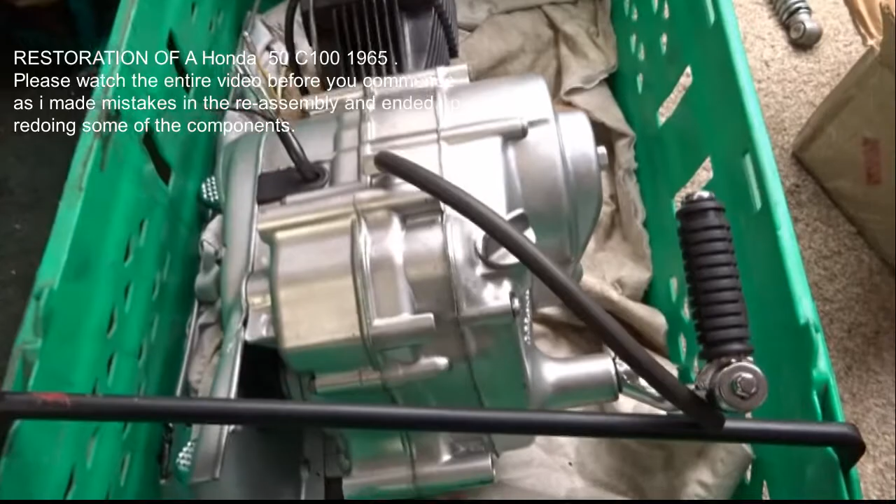This video is the reconstruction and restoration of a Honda 50 C100. I think it's 1964 or 65, probably 1965. I've had the engine restored by a friend of mine. We did a deal on some parts and stuff like that.

These are some of the component parts for it, some new parts, some old parts. These are the two wheels from it, and I have more parts inside in the box here.

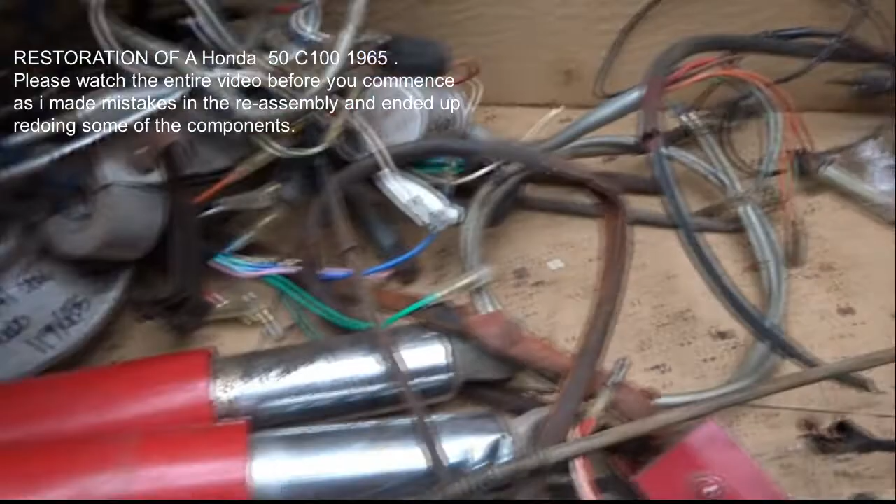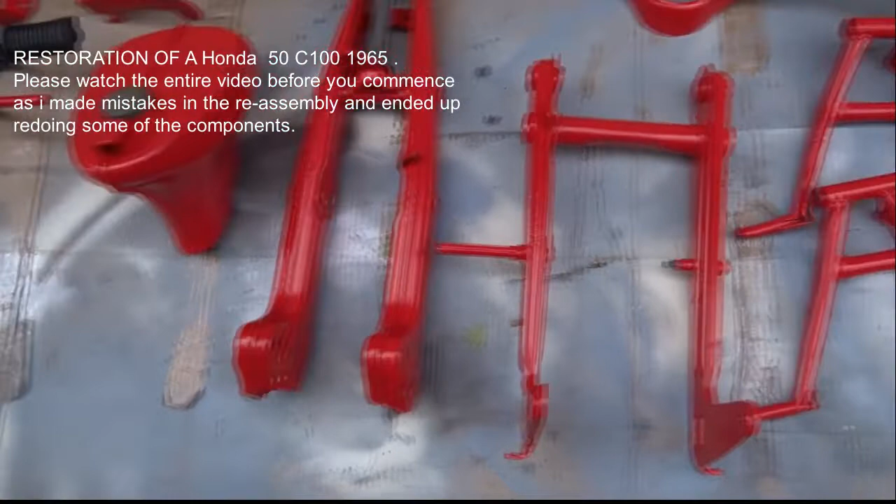These are the main components of the Honda 50 C100, which I've had powder coated. I did two leg rest stands, the petrol tank, swing arm, handlebars, and the back swing arm. I had two stands, so I got them done as well. These are some of the suspension components, which have been in a box now for a few years.

Taillights and grips and stuff like that, and this is the existing seat that was on it. I'm not sure if it's the correct one, but I will check it out and make sure I put the right one on. So that's it. Start putting it together now.

Now I'm starting to restore the bike. This is the front swing arm and this is the main frame. So we've got to put in ball bearings. I've just put grease in there initially, so I've got to put 21 ball bearings there. I must actually grease that side of it as well and put in 21 6mm ball bearings. So that's the next procedure.

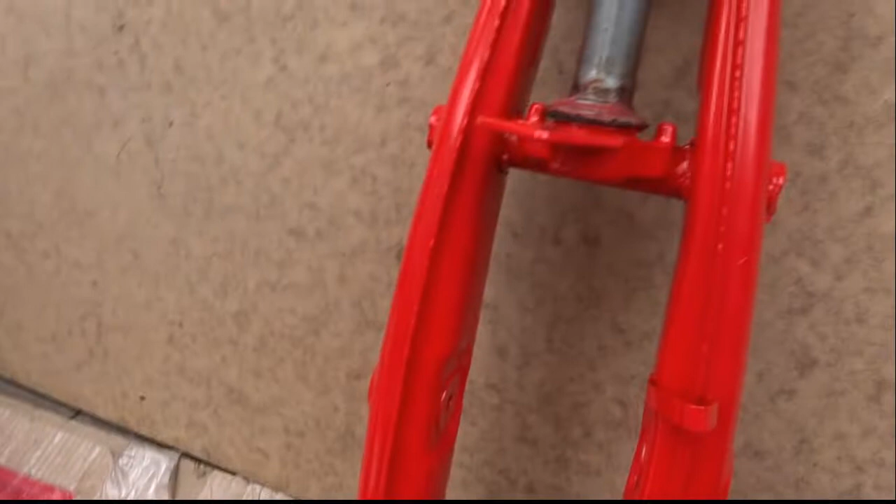I put on the ball bearings, and this goes up here once the ball bearings are on, like this. Now that's the 21 6mm ball bearings there.

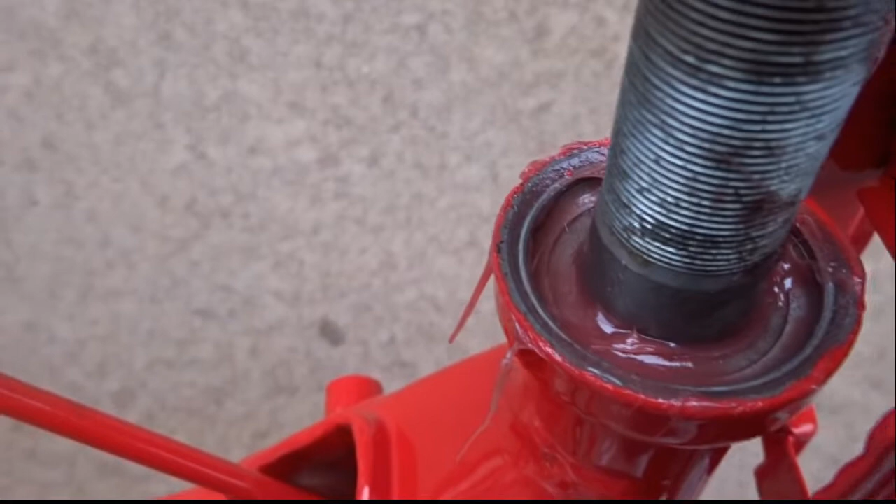Now that's the swing arm and front inserted into the main frame. I've just greased this area here to put in the other 21 ball bearings. Now that's the 21 ball bearings in place. I'll put some more grease on that now.

And then put the top race on, which is this piece here, and it goes down that way. Now I'm just inserting the top race, which goes down there, and it spreads the ball bearings out evenly.

And then this is the next piece that goes on, down over that, and screws down all the way.

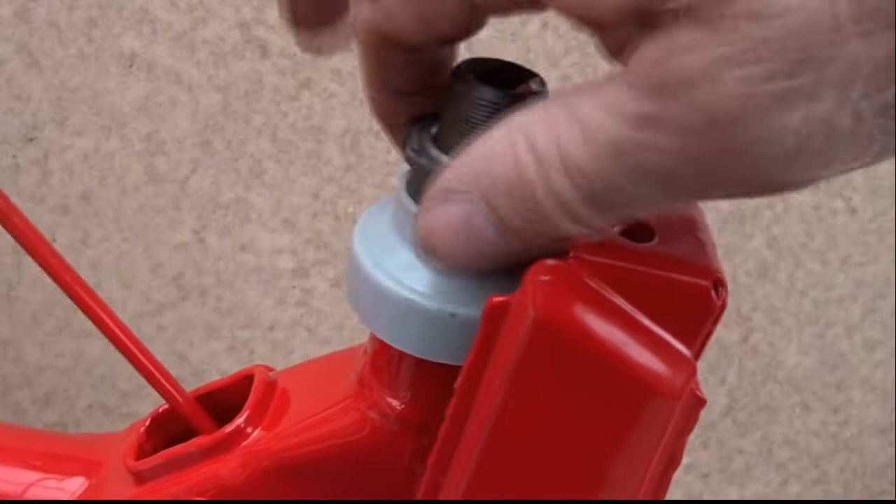Right, that's down in place. Now the next piece to put on is this piece here, which takes the handlebars. There's two holes there and two bolts that must go in there. I must have a look and see what size bolt goes in there.

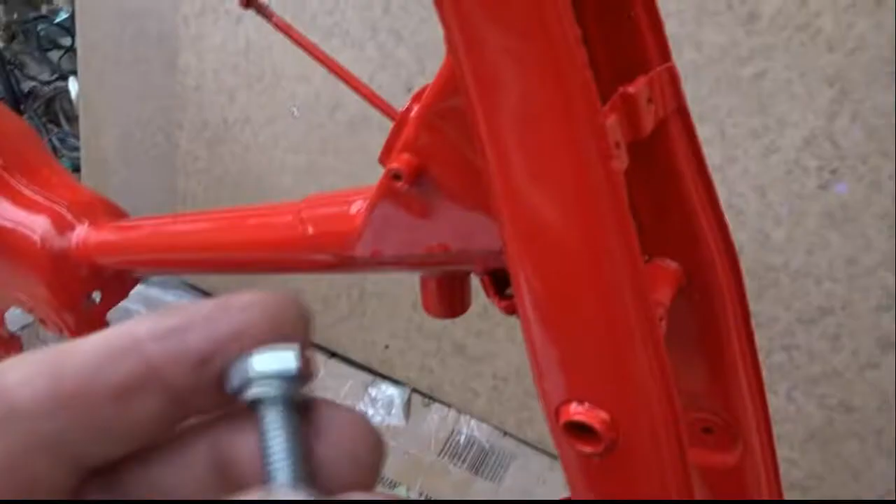And this nut tightens it down here. So I must check in the book now to see what bolts go down there. Right, I've looked at the book. Now the book that I have doesn't give the size of the bolts, but I'm using 8 by 20mm with a spring washer. It says shake proof washer there. I'll see if I have shake proof ones. Actually, I might put a shake proof one on it, but the spring washer should do the job.

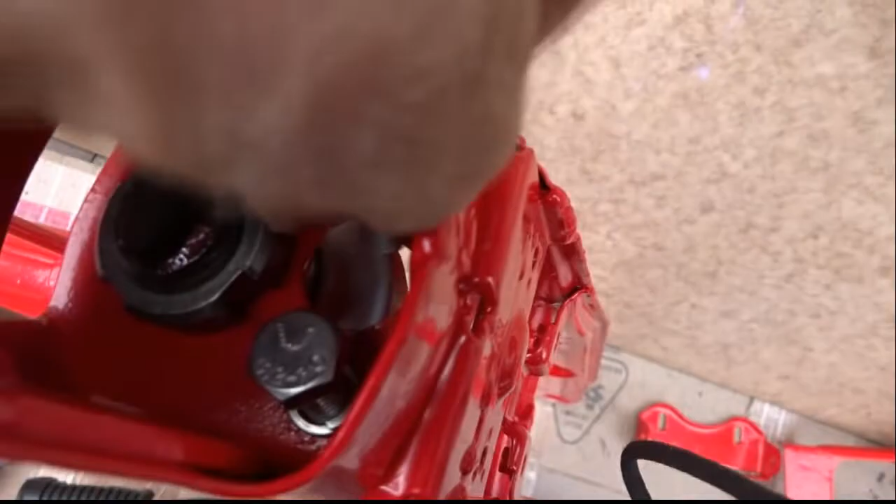I'll thread the two of those down there now. You need 2 hands, 3 hands, or 4 hands sometimes if you're filming as well. Now that's the 2 8 by 20mm ones I've used, that was what I had. So I must just tighten up this bolt here a bit more now.

There doesn't actually seem to be any kind of a lock washer or anything on that, which is unusual, but I'll just tighten it up a bit more. I don't have the special tool. I would imagine there was a special tool because there's 4 grooves on that there, but I don't have it, so I'll have to improvise.

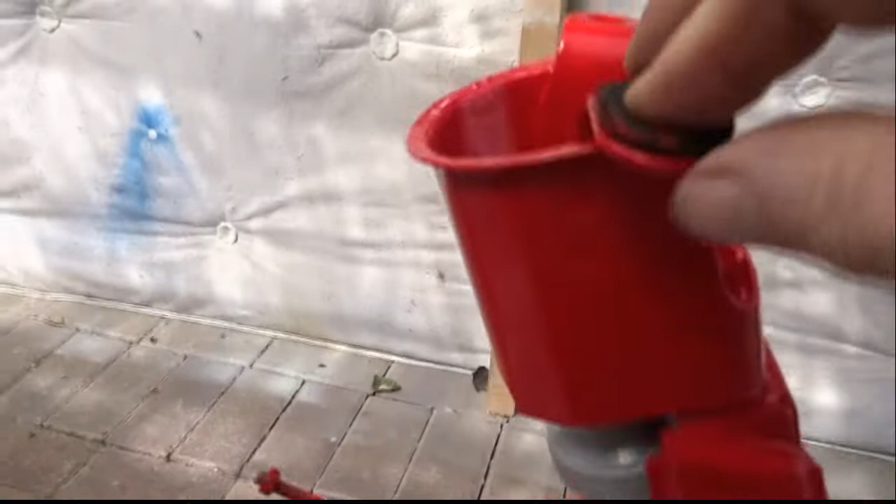Now I'm fitting the handlebars. I've attached the indicator units, and I have the components here. This one has a little section on it like that one there, number 13, which I would assume goes like so, to cushion the handlebars.

Underneath that then, what I've got - now this one looks like it's got a rubber attached to it, which is like this, but the other one that came off of it is like this. So I would assume that one will go up underneath like so, because it actually fits into that section there, fits into that there.

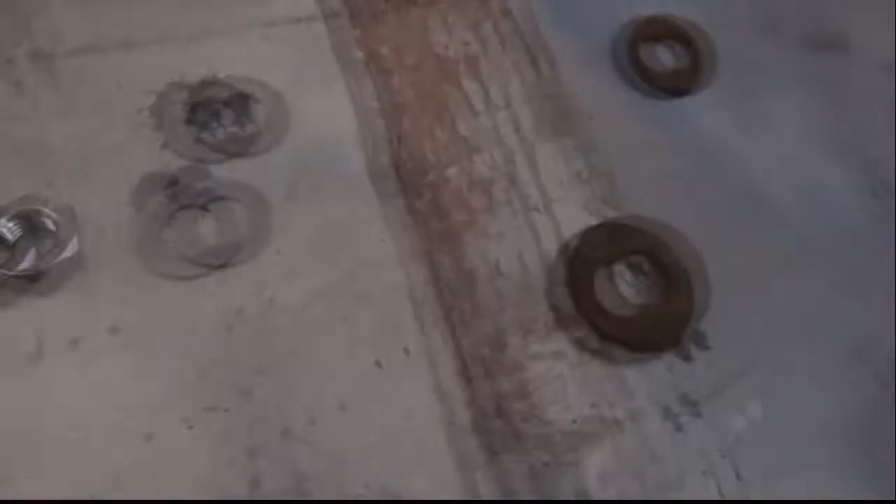Then it shows a washer and a nut, so I'm going to put on a couple of new washers. That's the old washers there, I'm not going to use those. Put on the new washers. Now I've installed the 2 rubbers and I'm going to put the handlebars down over it.

Like so. And that does cushion them nicely.

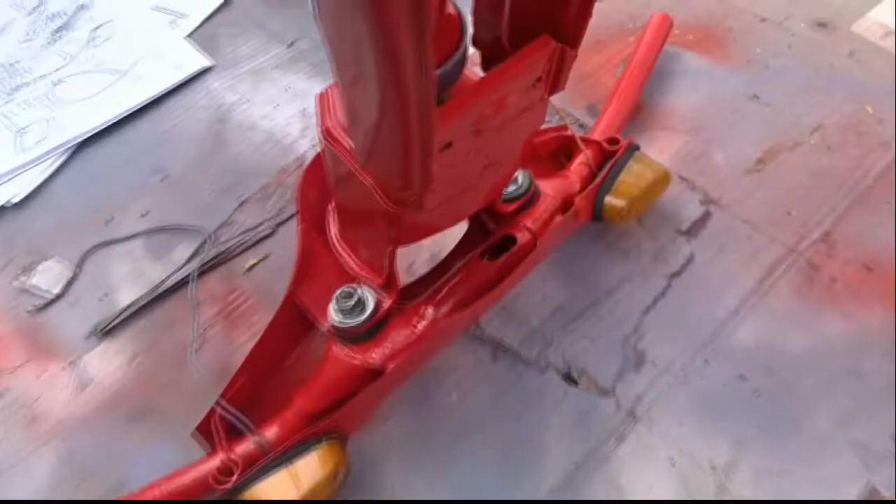Now I'll put on this fella underneath, a couple of washers and a nut. I've just turned the thing upside down because it was easier to put it on, and that's the handlebars in place there now.

Now I'm attaching the lock next, which goes on with these 2 little screws which I got off of the old lock. They didn't come with the lock when I bought it. That's the lock in place there now with those 2 little screws.

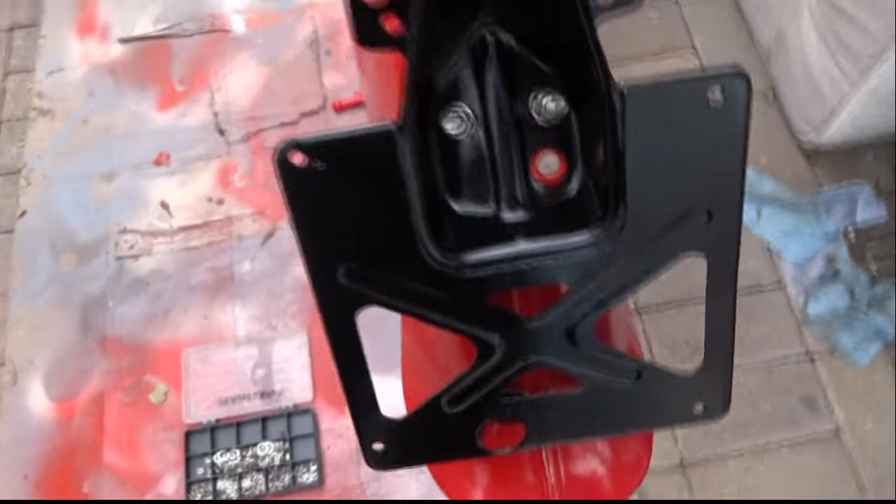I've just put on the stand temporarily there just to put on the rear number plate, and I'm putting it on with stainless steel bolts. There's a 3rd one down there. I hope that it'll work that way now. I'll have to check to make sure that it's okay.

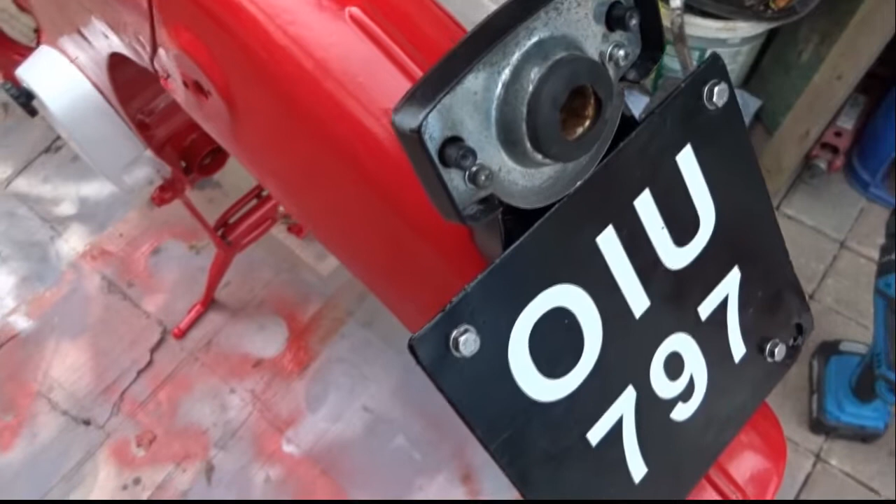Now I've installed the number plate and I've put a couple of new bolts on it to keep it in place, and it's ready now for the taillight. There are 2 bolts that go through the glass that I must get that go in there, and that'll be finished.

I've just put on the side covers there, I'll be taking them off again, and I put on the stand temporarily. I have put on the front suspensions, and I'll go through that now shortly.

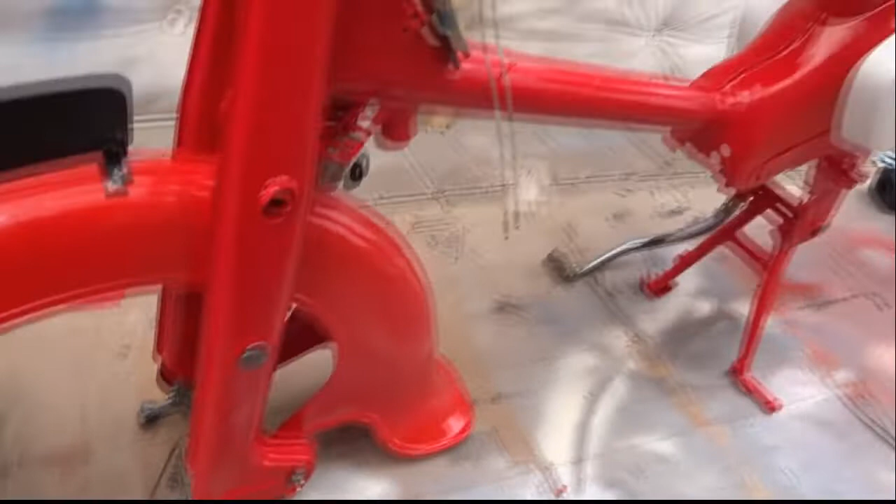Now I'm just going to go through the stage of inserting the suspension, which I've already done. Basically what you have to do is, when the bike is upside down - I had it upside down, I'm doing other bits at the moment now, so I can't turn it upside down - but you put the suspension up through the frame like so until it reaches this hole here.

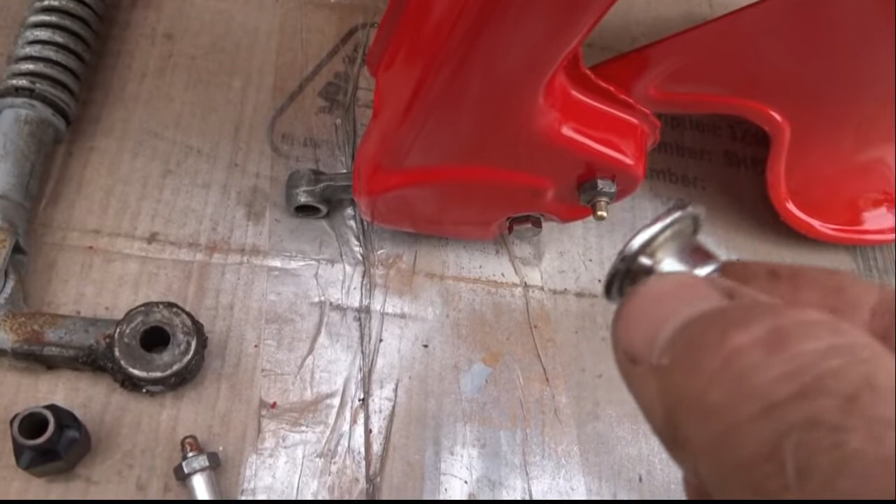Get this section here at the bottom, this section here, to line up inside here. And then put this bolt through here, and this is a special bolt. It's got a small little groove on it there, and there's a similar groove on the frame itself. So you put that through and you tighten the nut up just hand tight.

Then you get this section here in here and you wiggle it about, and you get this bolt and you pass it right through. Now this bolt has a grease nipple on it for greasing, because that needs greasing. As you can see from that one there, it's all grease.

Then when you have the two of them installed, you can then press down on this section which pushes the spring back, and you can then get this section in there and you can line it up. That's the cushion, rubbery cushion support, and then this is the bolt that goes through, so you push the bolt through. Must keep pressure on this at all times so that this thing sits in the right place.

There's no good in sitting it like that. This is the correct way for it to sit. So that's how that was done.

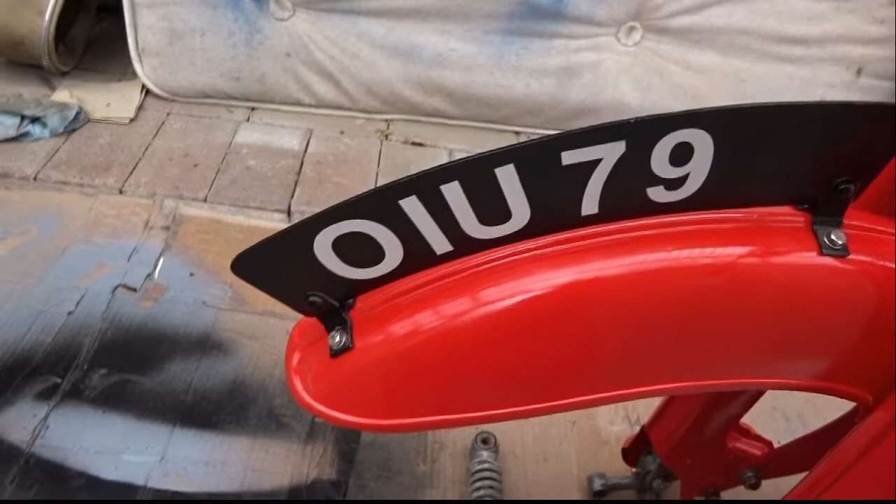I've also put on the number plate. I'm still waiting for a part to come, but there are special brackets which were actually on the number plate to avoid the ridge that's on the front mudguard. As you can see here, they're kind of light, but I put them on with 5mm bolts and washers, spring washers and nuts. So that's that.

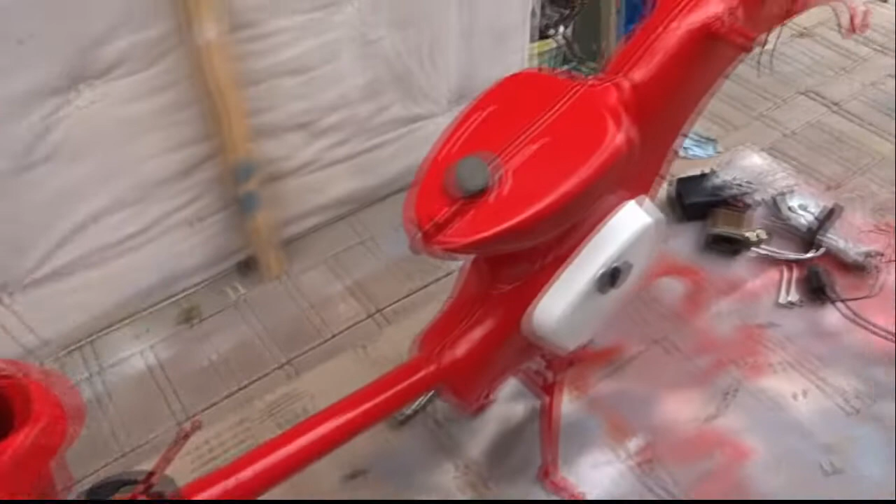What else have I done? I've installed the rear light, rear number plate, and I have the rear light. I must get the 3x60mm bolts that go in there, and I must get a little rubber thing that goes there as well.

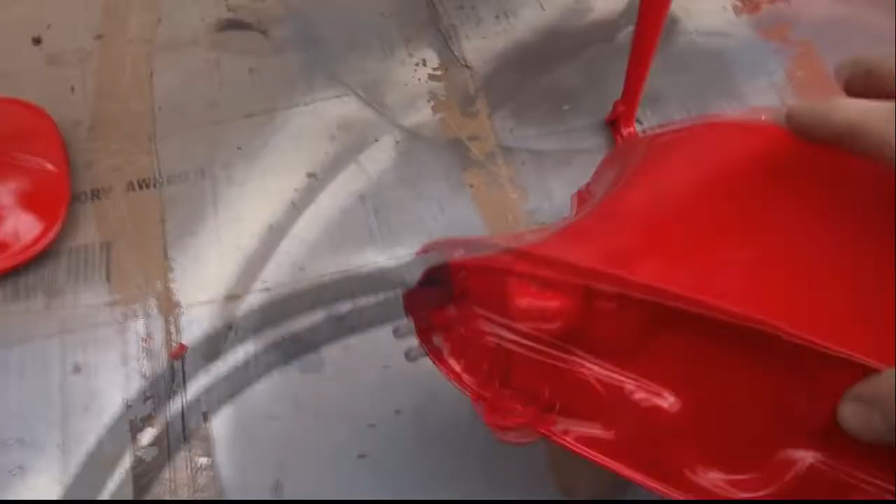So what I'm doing at the moment is I'm fiddling about with the petrol tank. I just put it in there a minute ago just to look at it. So there are two connections on the petrol tank, and these are the old petrol hoses that came off of it, so I'm just going to look at them now and see if I can reuse them. This is a new one that I've installed at this side here, but I'll see if the other ones are usable.

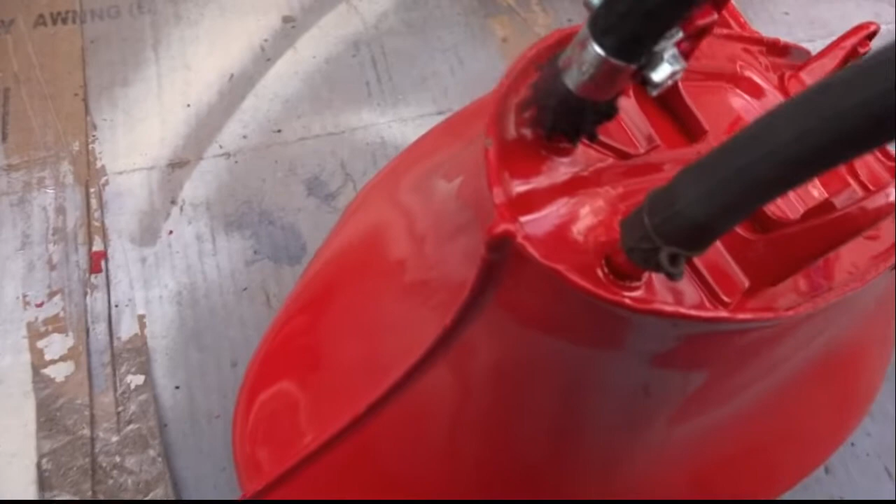Now I'm just after attaching the two. I was able to reuse one of them, I could have used both of them, but as I had this on, I left it on. So I'm after just putting on clips there as well. So now I'm going to insert them. They must go down these two holes here, and there are 4 bolts, 2 at each side, to attach it.

Now that's the tank in place, with 6x24mm bolts as recommended. I'm using stainless steel ones to avoid rust.

Now the next piece I'm going to put on is this piece here, which takes the seat. It goes in like that and down like that.

I think this is where the suspension goes, so there's obviously bolts for this. I must find which bolts, but I think probably 8mm bolts. I must just give it a tap in place and line it up.

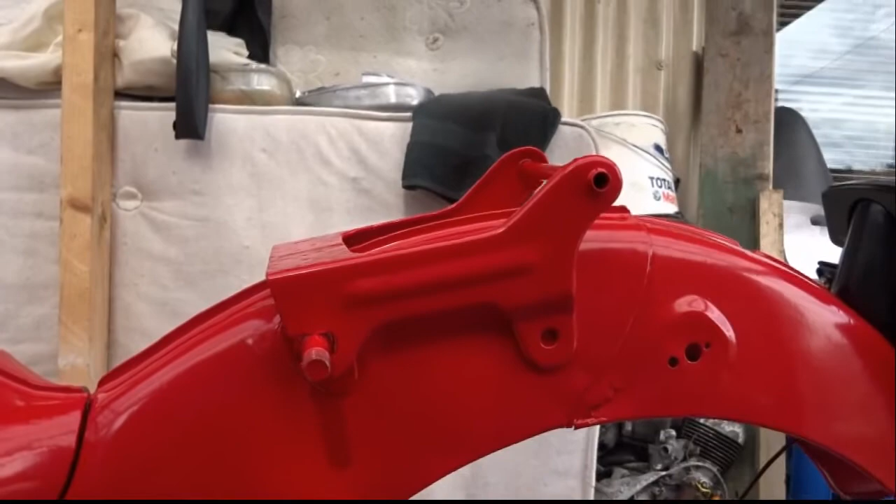Now I've installed the seat holding unit, and I've used 8x16mm bolts, with dome nuts on it, so it's only just two, one at each side.

Well, it looks like in there. So the next thing to put on now is this. I don't have the seat at the moment, I have the seat that came off of it. I might put that one on actually. There it is there, just for the time being while I'm waiting for the other one to come. So this is the seat that came off of it.

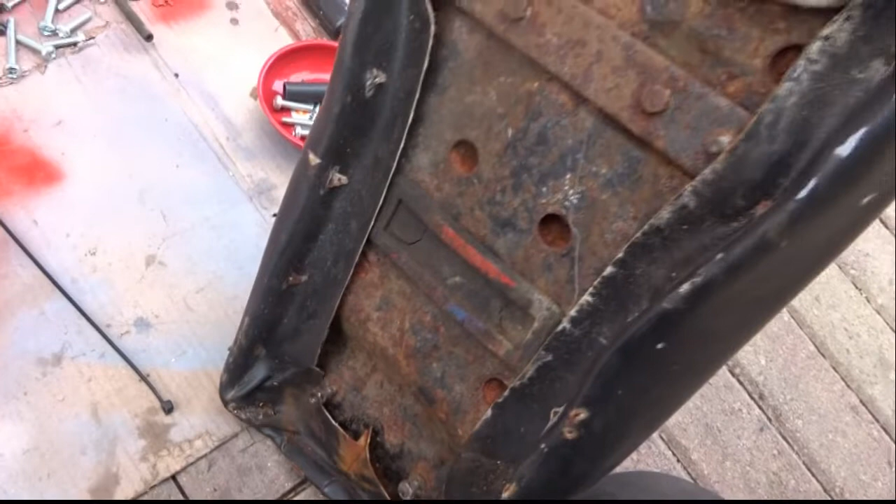But I've been told that, even though I've seen pictures and I have the Honda 1960s C100 and C105 parts list, and the seat is black on it, I've been told that that's incorrect, so I've ordered the grey and white seat, so that's on the way.

So I'm attaching this bracket on here now, just temporarily, just to put it on and see what it looks like, while I'm waiting for the other seat to come. So I need to put in a washer, spring washers.

And tighten up those two nuts, and then attach it on there with this special bolt. So it says in the book to use the special pin, flat washer, spring washer, and a 6mm nut. Now that's actually for putting the seat on, but for putting this bolt on, I'm going to put a washer as well, a spring washer and a nut.

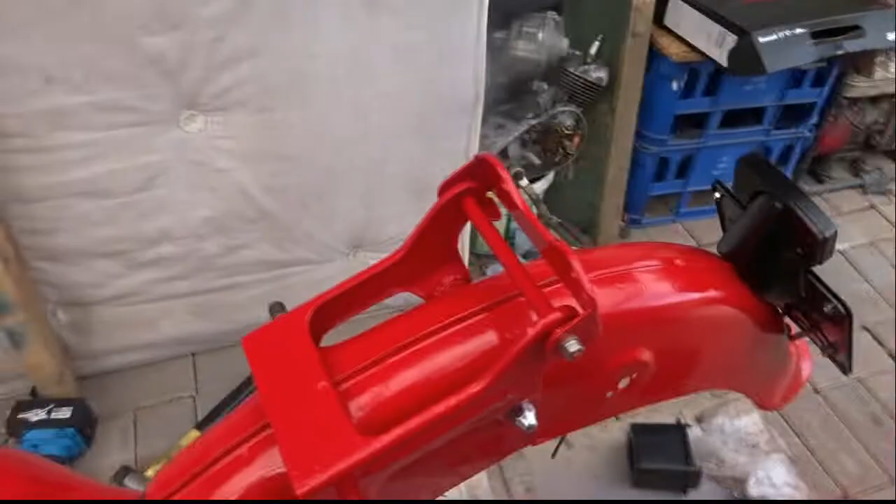So that's that in place there now, the special bolt going through, and it swivels backwards and forwards. You have to put it on before you put the seat on, otherwise you won't be able to get the bolt through.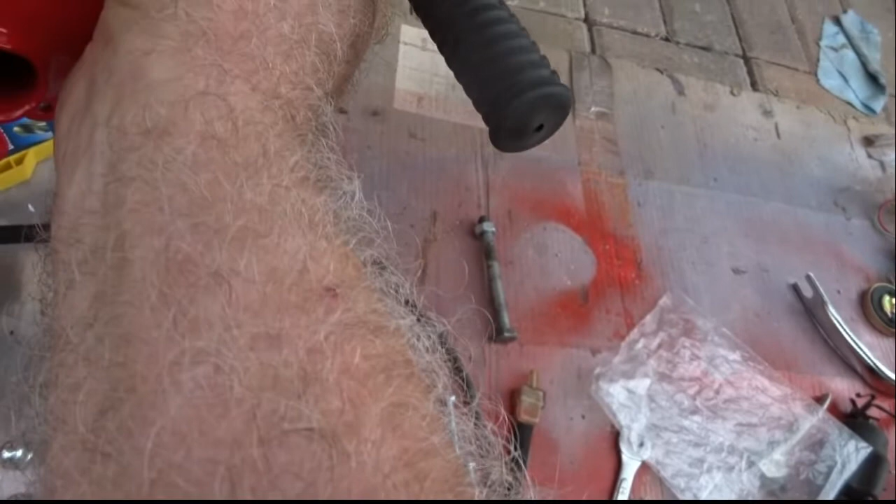This is the rear swing arm section, which goes on something like this, through there, and the rear footrests are on it, and the wheel goes on there, and the suspensions are attached there onto that, I presume.

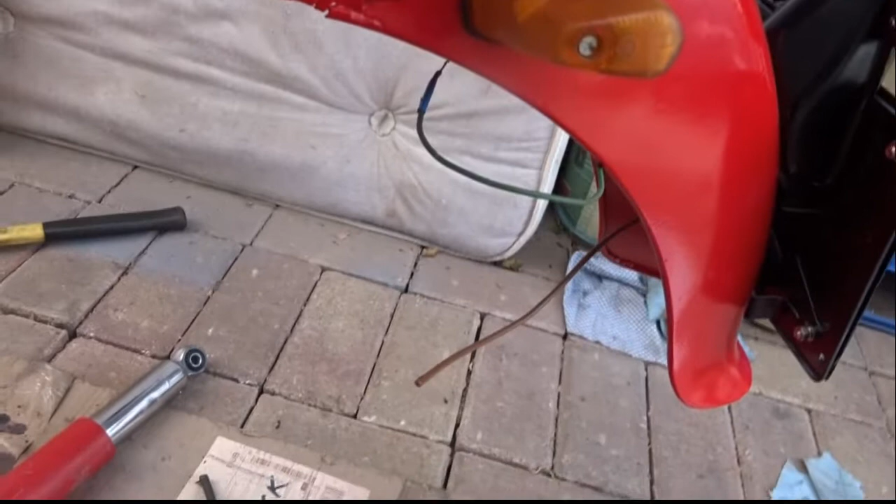I'm just installing the rear indicator units there now. This one I have fixed in place. The other one is here, and basically it's a 10mm nut at the back there that holds it in place through the frame, so I'm going to put that on now as well. That goes through that hole there. So this is the hole at the other side here.

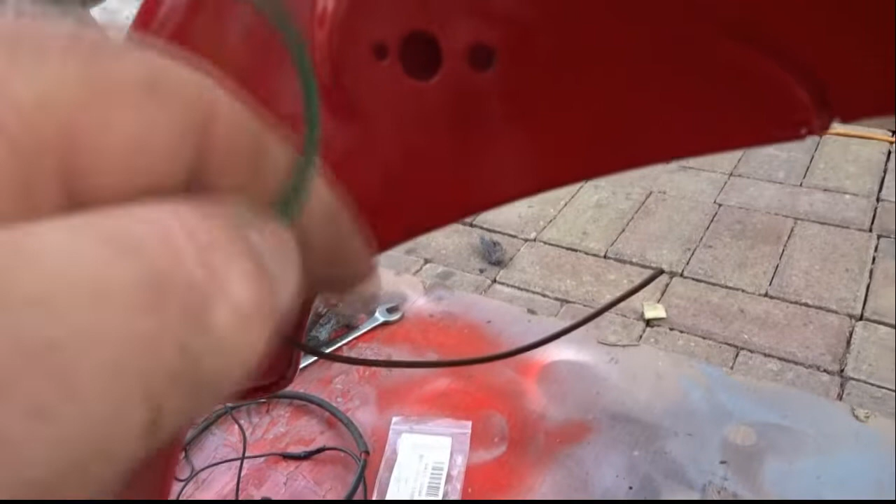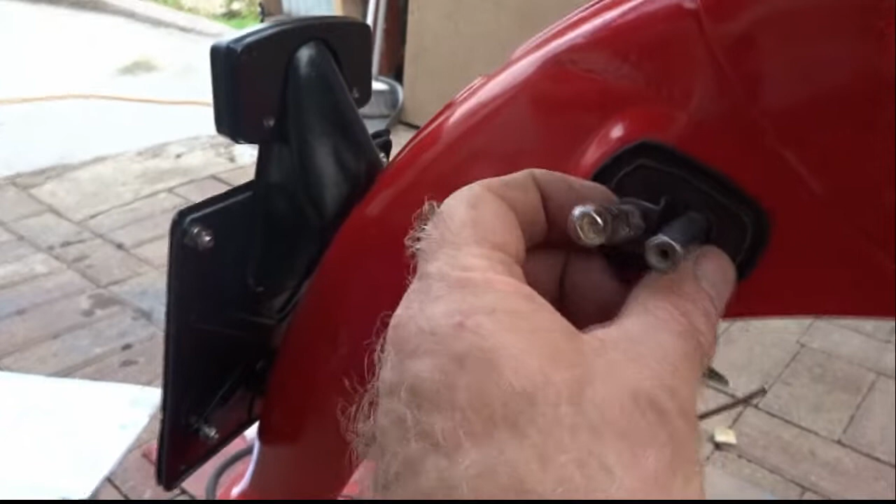The wire goes out through this hole here, and the unit itself goes through that hole there, I think. Yep. And it sits kind of like at an angle. So I'll tighten up the bolt and the spring washer in behind it now.

Now I'm just after putting on that air pipe there. I've put on the air box with the filter inside it and the cover on it, just to put them on.

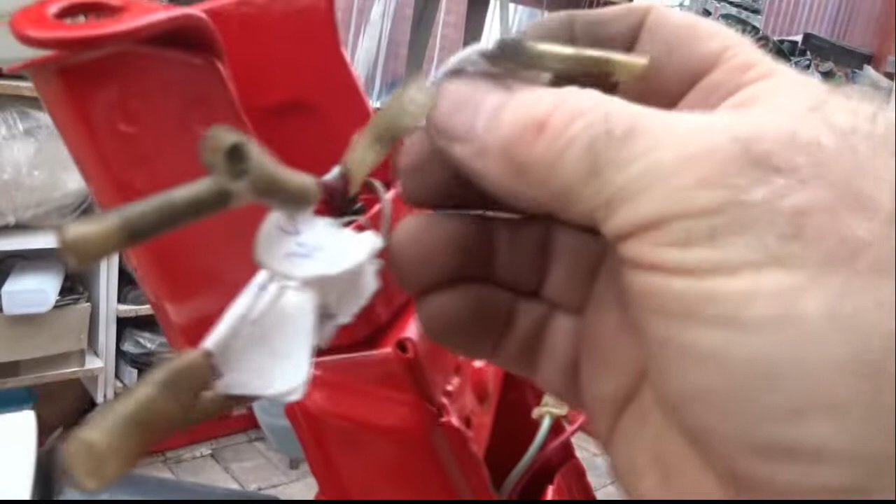I've been putting on the wiring harness, which is here, and I have it going up here and out here. I had all the wires marked B5, B this, and to get it up here I had to actually take the handlebars off.

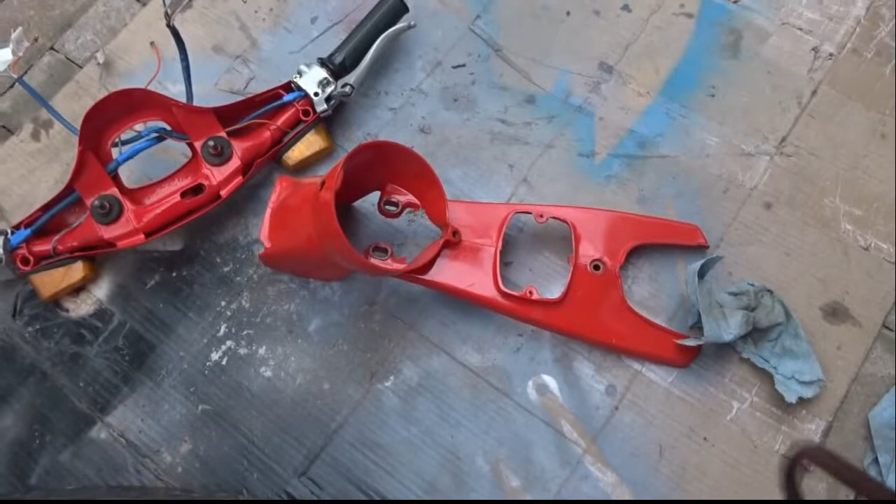And I'm at the moment putting in this horn here, because you can't have the handlebars on when you're trying to attach this covering here, which covers the horn. So I'm putting this on at the moment now with stainless steel bolts. There are 2 wires coming off of it which I didn't have marked, but I would reckon they probably marry up with whatever colours are up here, hopefully anyway.

Right, so I'm going to screw that in there now. That's the horn in place. I've used 6x15mm bolts, so you could use 6x12, probably would be about the size of it.

Now I must just see if one of these wires matches up with some of these wires up here. There's a red wire here which I don't have a number on, so I would assume that that wire lines up with that.

All the other wires have it, except this one. This one doesn't have it, but then it doesn't match up with this. So I'll have to have a look at the wiring there later on.

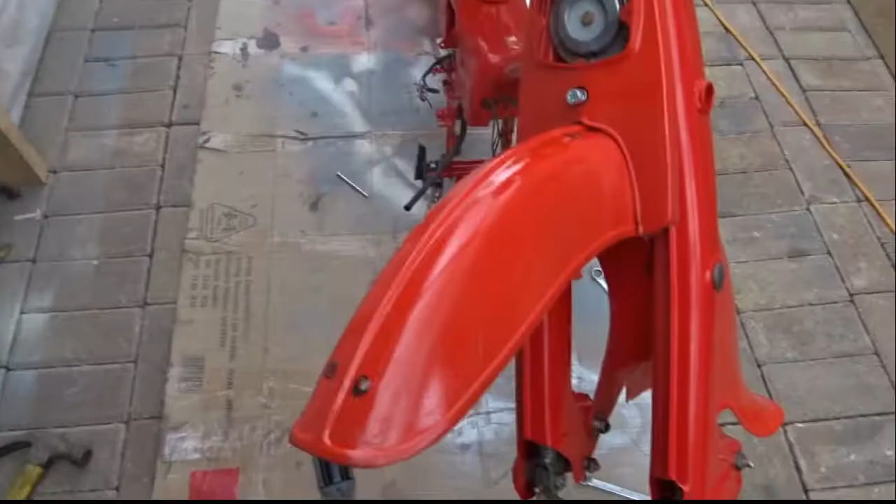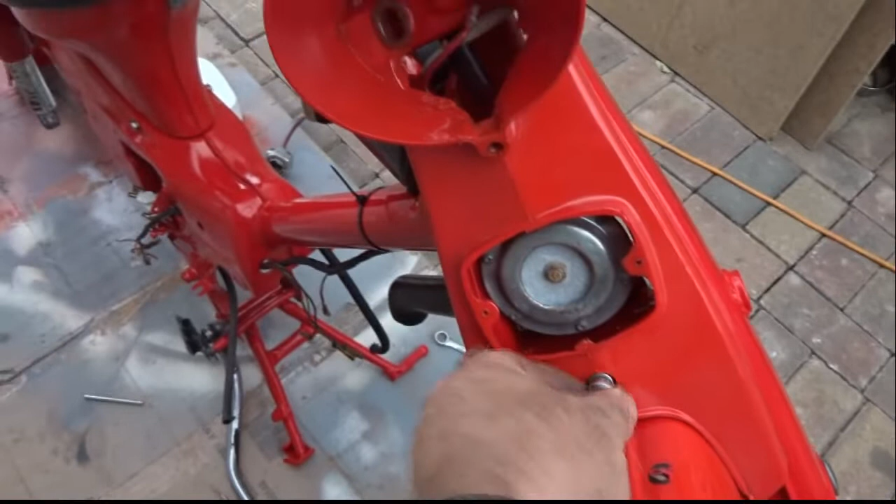Now, to get that housing on that covers the horn, I've had to take off the number plate. So if you have a number plate like I had, don't put it on until you have the horn on, so you can put on this covering here. I'm installing it now with a 6x37mm bolt, but I had to rethread it with the taps and dies.

So that's going back on there now, and I should be able to put the number plate back on, the handlebars back on, and the temporary wheel. That wheel I had on was just temporary.

This is the covering that goes on there, and I'll be using 2 self-tapping screws into the plastic there. That's the horn cover in place now.

So I'm going to put the number plate back on now, and I think I can put the handlebars back on as well.

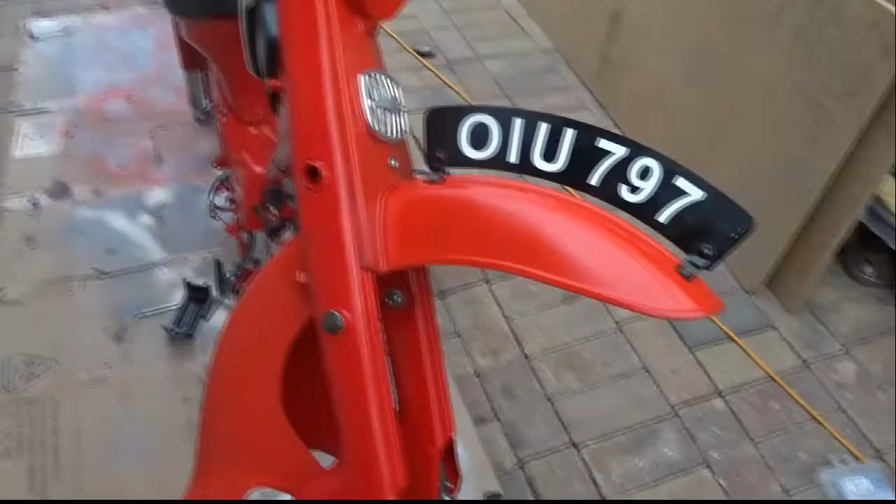Now that's the number plate back in position. I've tightened up these bolts here, and I actually changed them because the wheel was rubbing off of them when I had it on, so I put in narrower ones there. I had those ones on it, but they mustn't have been the correct ones.

Now I'm after installing the 2 rear indicators with stainless steel screws that just came in the post today from Hong Kong. So there are the 2 of them done, and I've also put stainless steel screws in the rear taillight, which I was waiting for as well.

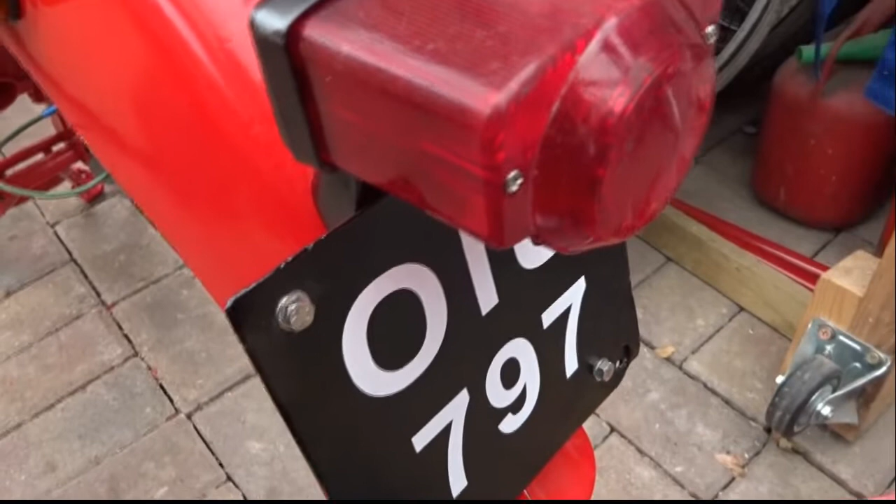I've just installed the rear taillight with stainless steel screws that I was waiting on in the post from Hong Kong, and I've also done the 2 side indicators, and I've used stainless steel screws there as well. There's nothing worse than trying to get these things off again at a later stage.

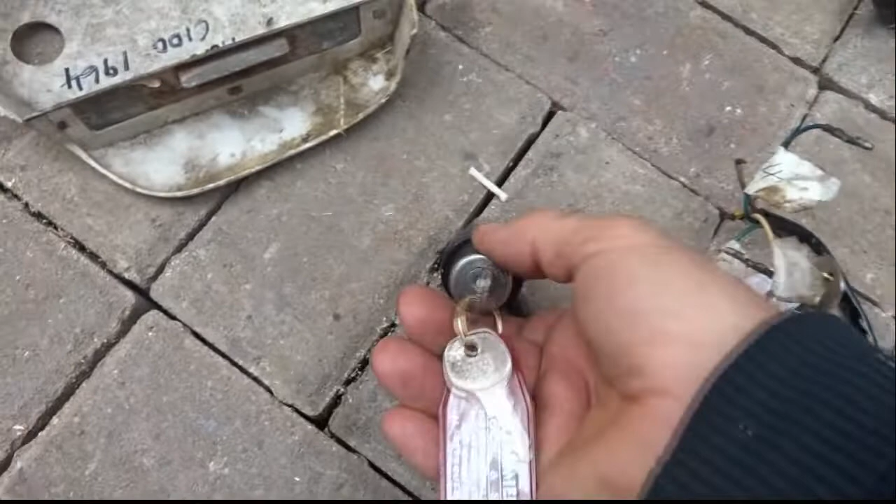And the ignition switch, these are the ignition switches that I had off of two C100s. So I took them to a company in Cork City, and I got the keys cut for them because the keys were missing. So now they're working again.

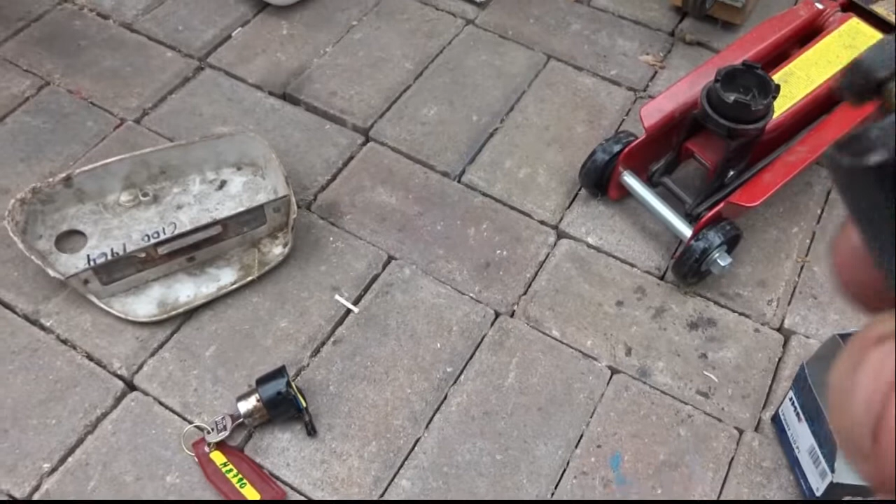Now the keys are working, but one of the lugs is broken off of this one here, so I'll have to try and find some way to rectify that. And the other one, both the lugs are broken off, but I'll figure something out to do something with it.

It's important, I think, to have the original ignition, even though they're not in the greatest shape, but they're not too bad.

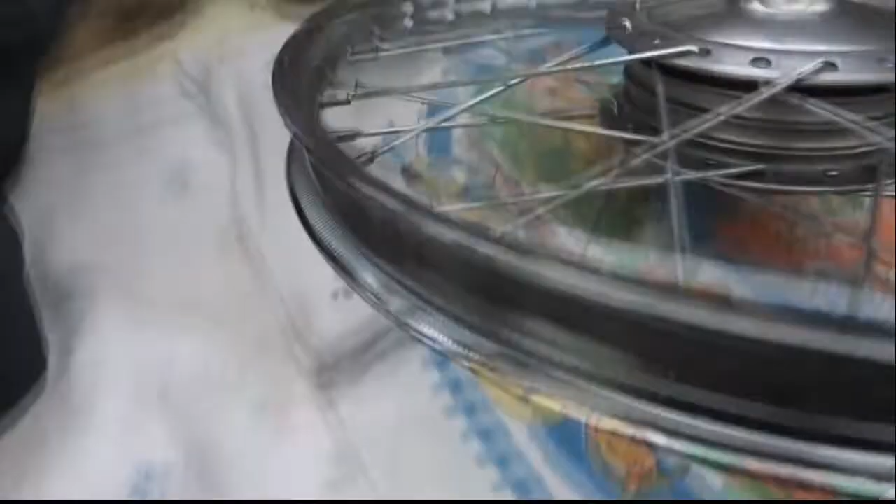Now today I'm getting the front wheel sorted. I've just put on the rim tape. This is a new wheel that I bought on eBay. It is an actual 1964-65 wheel, and I bought a new tire and tube, and I'm putting them on there now.

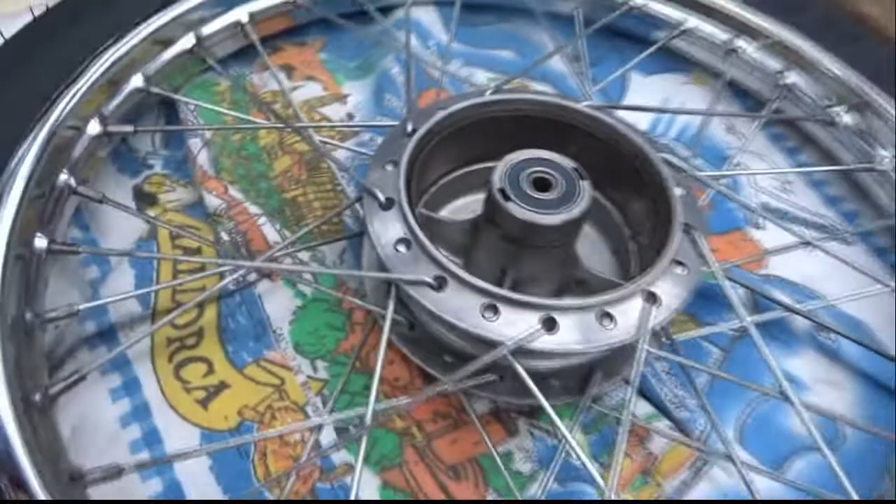Now that's the front wheel, tire and tube on. And this is the brake plate unit, typical of 1964 and 65. I've just installed the wheel there now, and I've put on the brake on it as well. So that's the front wheel finished.

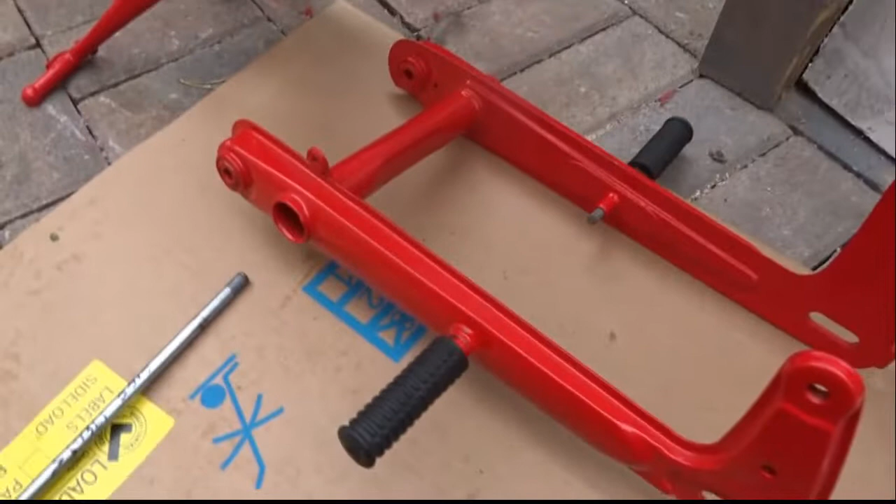Now that's the rear wheel put together. The rest of the mechanisms are there, which I'll get to later. What I'm doing at the moment is putting on the rear swing arm for the suspension. The suspension attaches here and here. So it actually goes on here, and this is the bolt that goes through there. So I must attach that on now.

Swing arm in position there now. That bolt goes all the way through, and finished off with another nut at the other side.

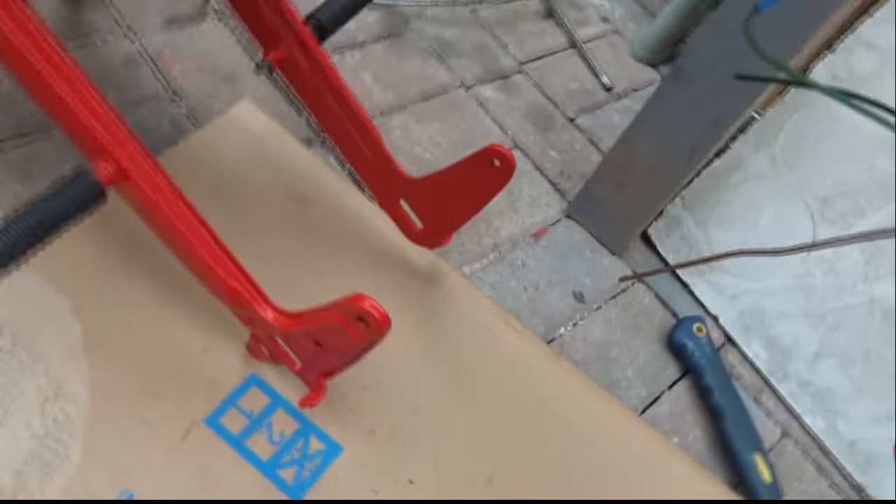As I said, the suspension goes on here. Now I bought aftermarket ones. This is one of the aftermarket ones, and these are 2 original ones, and you'll notice the difference between them. Much more material on the original ones than on the aftermarket ones.

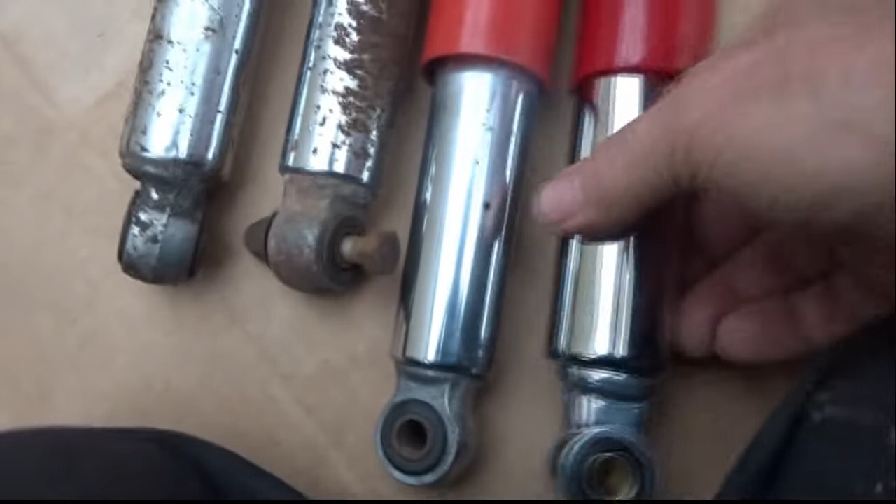I'm just wondering if I can actually take this apart and use these 2 pieces. I'm going to try to do that. But in any event, whichever one I put on goes on there, and goes on there like so.

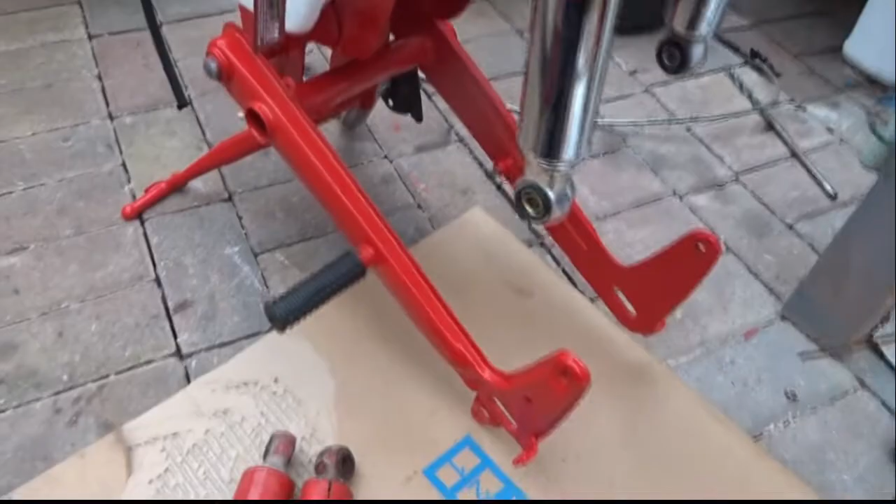Now I'm in the process of restoring the suspension at the rear, and this is one that I've just completed. I'm using several different pieces - I had 4 of them, so I've taken them apart and I'm using them. This is the second one I'll be doing now, and I've taken the chrome off one of the aftermarket ones that I bought and used the top of it, so it looks pretty good. It goes on here like so, and it'll be attached on the outside. So that's to be done next.

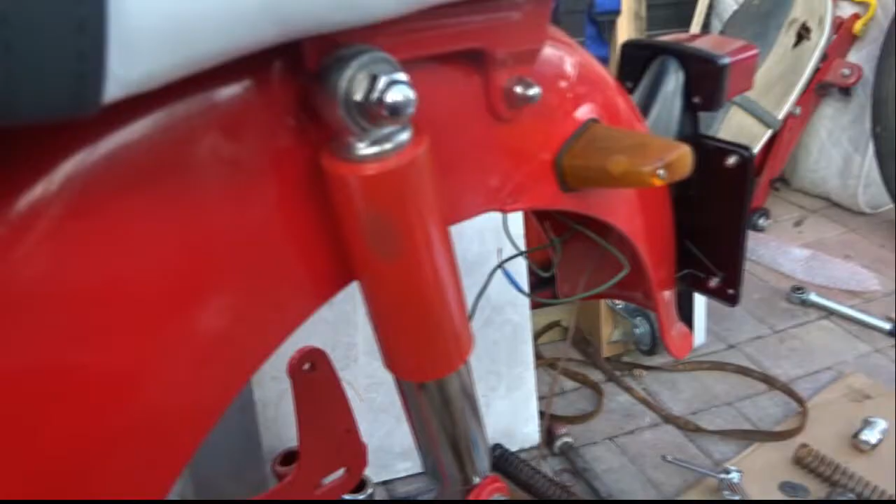Now I've just installed that suspension on the rear. That's it on the book there. Blind nuts, that's what they're called - I couldn't think of the name of them. These are called blind nuts. So it bolts on the inside - I thought it was actually the outside, but it wasn't. Now that's the second suspension on there.

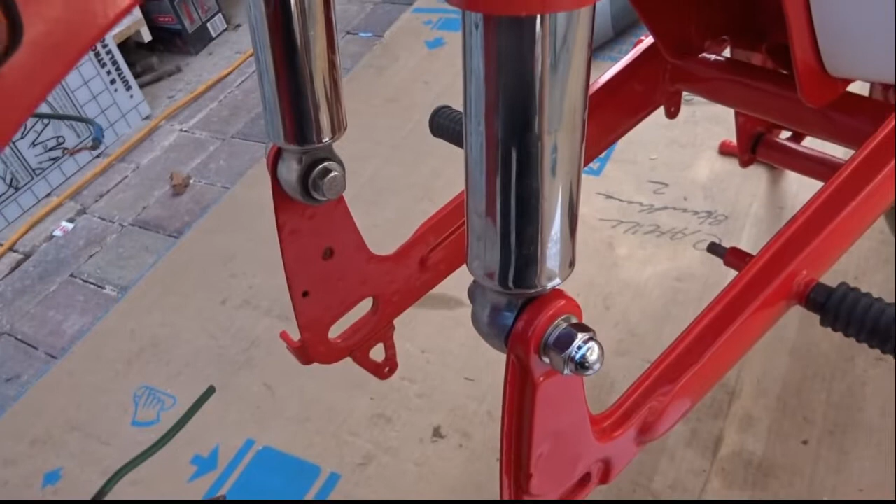And on the bottom, number 21 on the book, the bolts are 10mm by 44mm. So there's two of them required, one at each side, as you can see there. And blind nuts, 10mm blind nuts on top. The upper ones then are 12mm blind nuts, number 22. So that's it.

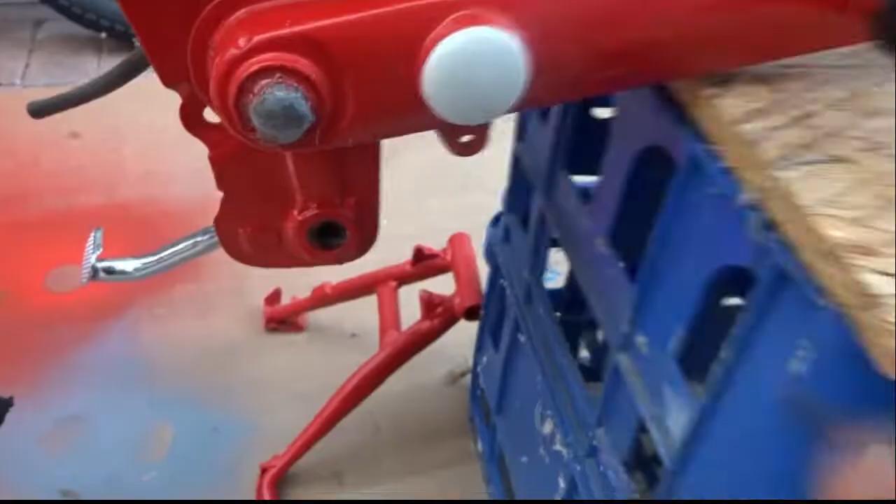Now that's it, as it is looking at the moment. I'm just after inserting that plastic spacer filler piece in there, and the other one.

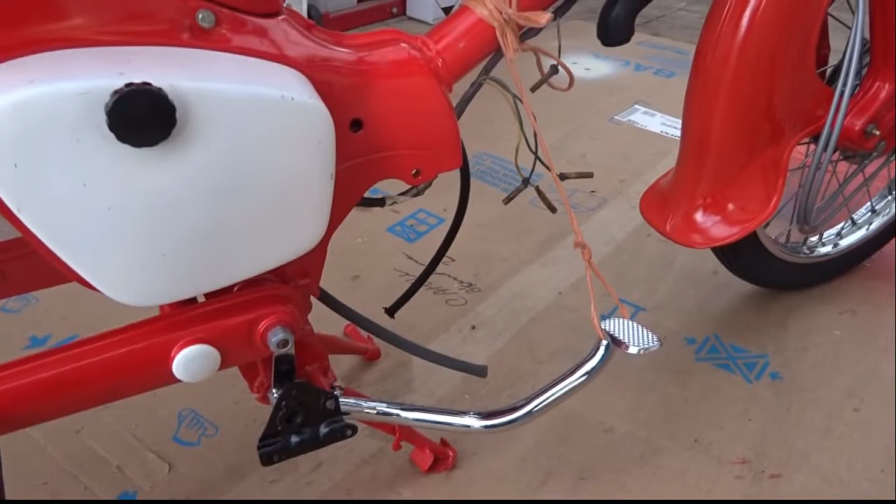Now this is the state of the bike at the present time. Yesterday I put on the rear suspensions there after restoring them. I'm at putting on the new rear brake pedal and that mechanism there. I think I can actually put the engine on at this stage, and I can probably put the rear wheel on as well. We'll see how it goes anyway this morning.

The front wheel looks pretty good now, the new one that I bought. And I have the mirrors on as well. Front light is on, just to connect up all the wiring. I'm not sure...

Where there's two petrol hoses. There's another one there as well down at the bottom. I think they probably come out this hole - I actually should have brought the wire out that, but we'll see later on.

This is the engine for this machine, which was restored by a friend of mine. I'm going to attempt to attach it onto the frame here now in a minute. So it's going to take a bit of time - we'll probably have to jack it up to get it on.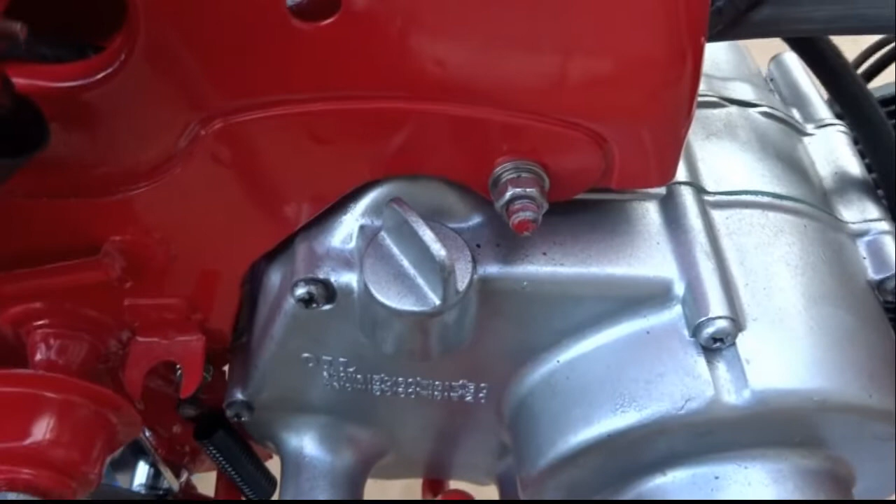I've installed the engine there now, and there were just two bolts holding it in position. This one here, and the one that comes through there, which has a special part on the end of it that the spring goes over, which is attached to the foot brake. I'm not happy with the way that's springing back up, but maybe I can get a shorter spring. That's probably seen its day.

So I connected the wires that were coming out there, the same colours, and I think I've got one wire which isn't connected to anything. So I have to figure out from the wiring diagram what that's all about. There it is - see, there was a green wire, black wire and a yellow wire, and that's all the wires that are coming out, but there doesn't seem to be any other wire this colour. Maybe it might be inside with the rest of the wires there. Anyway, that's what it looks like at the present time.

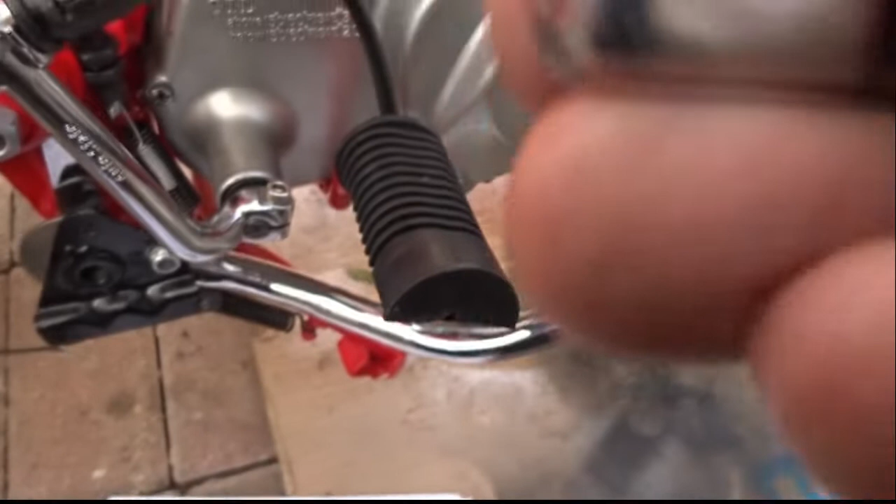I was just looking at how the leg shields will go on - they're the leg shields that came off of, which I must restore. But I was looking at it, and even in the book there I could see there was a little clippy thing which has to go on. This one goes on at this side, so I must take off that bolt again, which holds the engine on, and there's another one at the other side. I have it down on the ground over there. There it is, so I must take off that bolt.

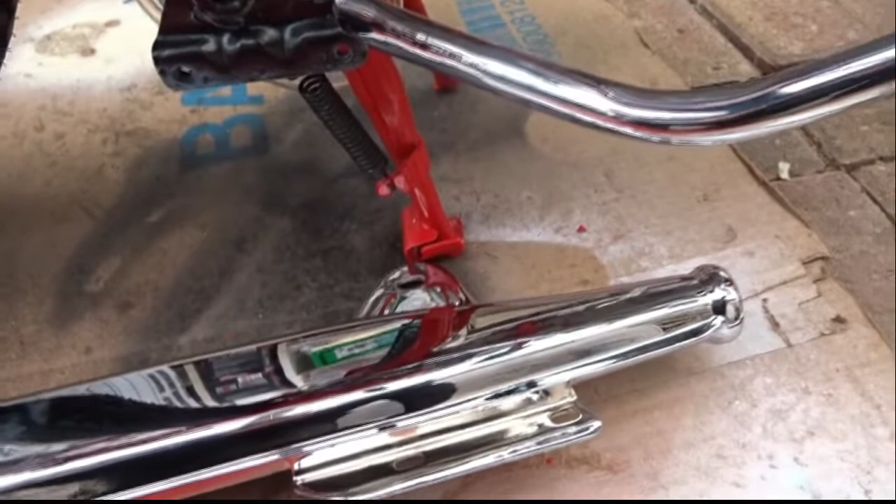I've installed the petrol hoses there now and attached them to the carburetor. I've attached the air hose. I'm after putting on a different stand on it because the stand that was on it wasn't allowing it to stand like it is at the moment. I've installed that unit there, which is part of the mechanism for the stand. I've put in a brake spring, but the brake spring isn't great - when you press the brake down, it doesn't come back up, so I'm going to have to get a new spring for that. I must put on the mechanism for the rear brake light there, and I'm now going to fit the exhaust pipe.

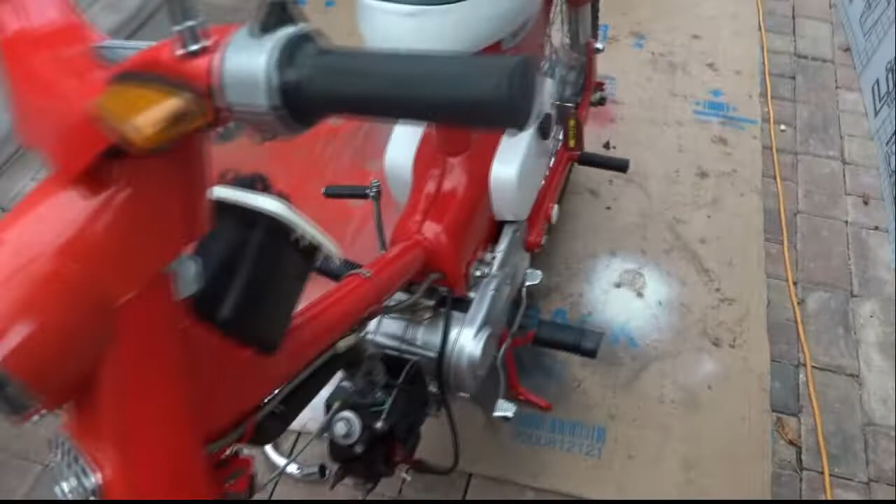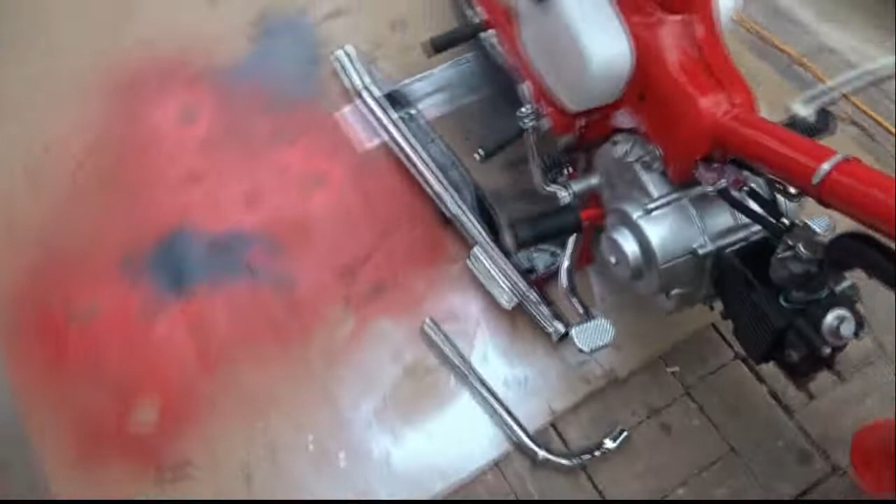I've also started putting on the rear brake arm here, but I just can't get it on over the thing at the moment, so I'll have another go at it in a minute. I have most of the wiring done, so everything is closed up. I'm not 100% sure everything is right, but hopefully it will be. The rear wheel is on, in position, and that's about it for the moment.

So we'll go now with this exhaust pipe. Now I've installed the rear section of the exhaust pipe, and hopefully I'll be able to put on the front piece. It says in the book that there are some pieces that go in here which don't come with the exhaust pipe, so I'll have to see about that. I must just tighten up that other bolt there, and hopefully that will sort that.

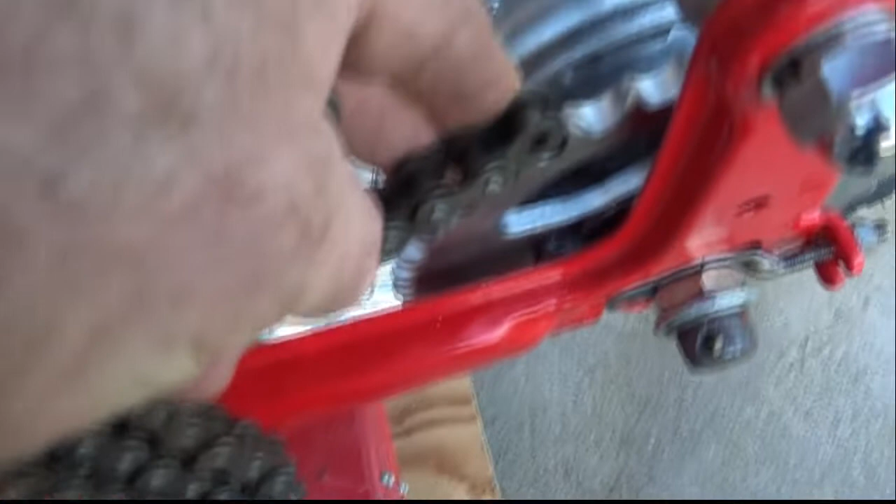Now I was just about to put on the chain, and when I went to put it on - the chain that was on the bike - it doesn't sit down on top of this cog at all. It won't sit down into the thing at all. It's too big. I bought it from a Honda dealer, but I think it may have been for a Honda 90. It's much bigger than the normal sprocket that was on it, which I'm just after cleaning off inside.

So I must take off the goddamn wheel again. Now I'm after changing the sprocket, and I've just put on the splicer, and it has to go in the direction that the chain is rotating, which is that way. So the curved section must be at that side. So now I can put the wheel back on.

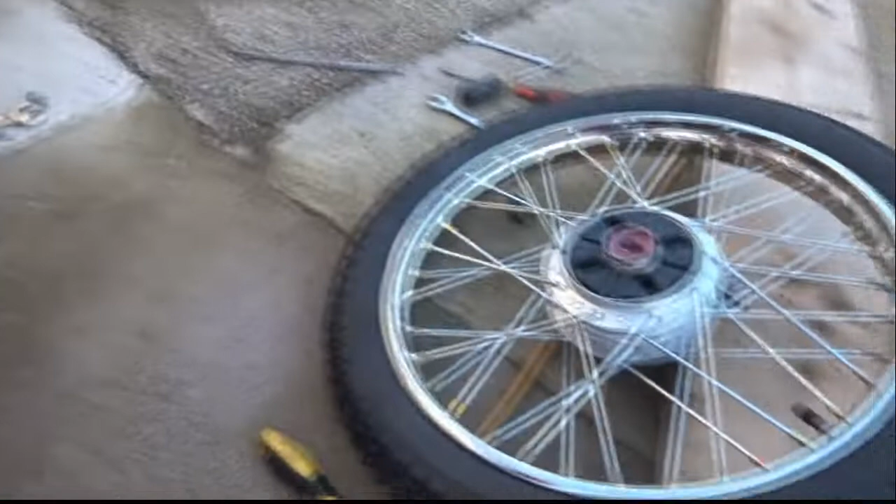The wheel now is back, the rear wheel is back on, chain in place. I've put on the exhaust pipe, fully up into the engine.

And I've just put on the leg shields. These are the original leg shields. I've put them on there just to do a bit of work. There was a bad crack up along here, so I've fixed it with a soldering iron, so hopefully it doesn't crack again. So I need to clean it off and paint it. I must give this one a small touch of paint as well.

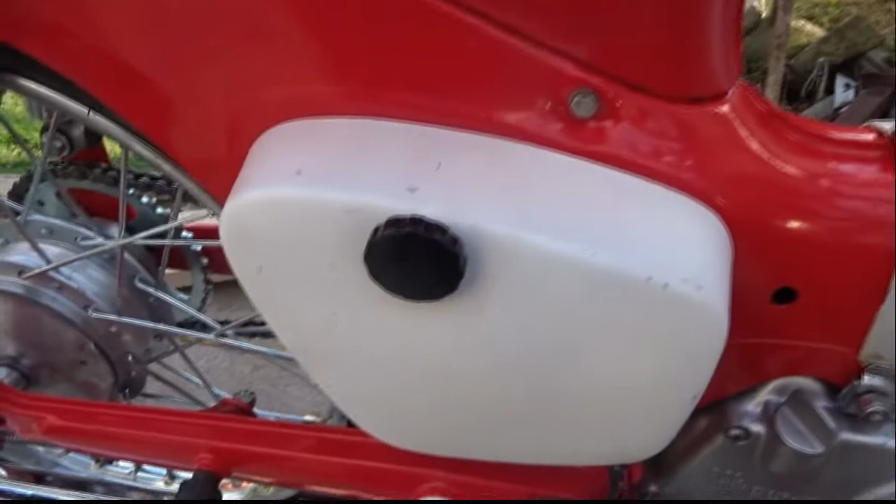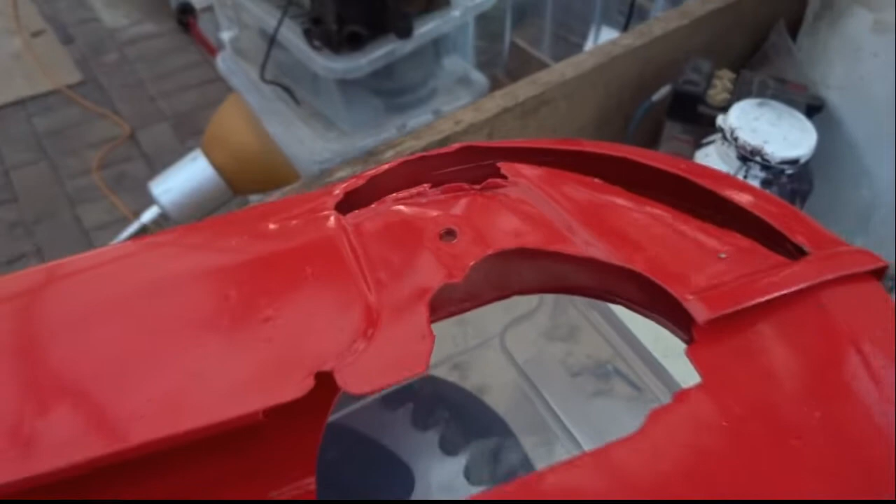These are the chain covers now for this bike. There's a piece of it cut away up there, but I am going to install it, and if I get a better one, I'll put that on later. So I'm going to put on the original one anyway. Just put on the lower casing there - the chain casing with 6 by 8mm bolts.

Now to put on the top one, it appears as if I must undo the suspension. This is the original leg shields off of the bike, and I'm after cleaning them off as best I can, and I'm after painting them. It was badly cracked down there, but I managed to fix it, so I think it'll be good to go.

I must put the Honda 50 emblem on there now - that's the next thing. And this is the bike with the exhaust on. Just waiting for the leg shields now, and I think it's finished then.

All I have to do is double check the wiring, put petrol in and see if it'll start once I put the leg shields back on. Actually, maybe I might start it before I do that in case there's a problem with wires or anything like that. So, hopefully it will start.

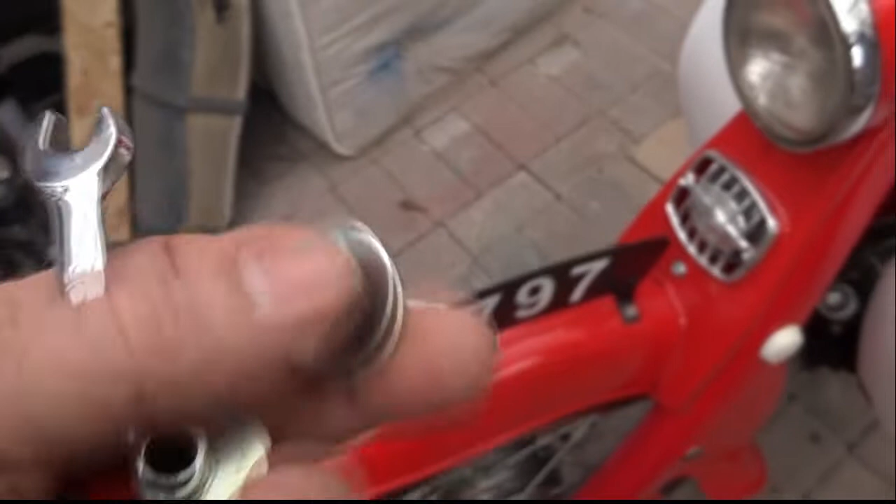Now I'm just installing the leg shields, and I've just put in one of the spacer units in there. This is it here, and this one is going at the other side. So the bolt goes through with 2 spring washers on it, and this unit here goes in behind and comes out - this section comes out through the hole here, and you screw the screw through to hold it in place.

Right, I've introduced the spacer there now, and all it is a matter of tightening up the bolt, which I'll continue to do. Now the 1965...